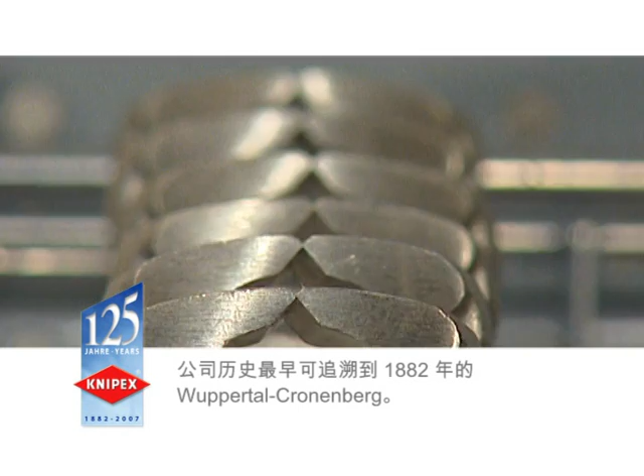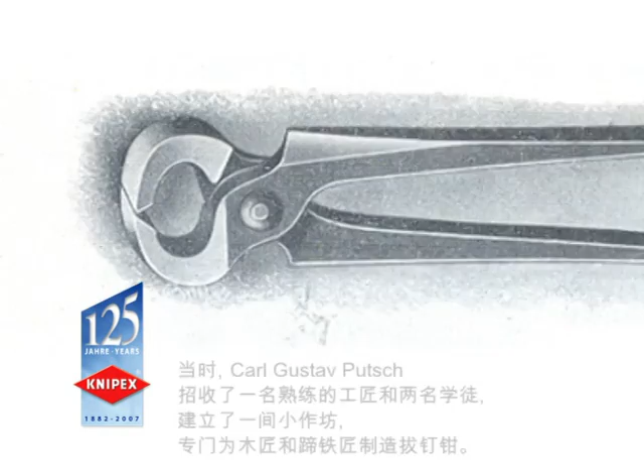It all starts in 1882 at Wuppertal Cronenberg. Carl Gustav Putsch sets up a small forge in which he, an experienced craftsman, and 2 apprentices manufacture pincers for carpenters and farriers. In the beginning, the small enterprise produces 60 pliers per day, all handmade.

At that time, there are more than 100 producers of pliers in the Bergisches Land region, the center of German tool manufacturing. Carl Gustav Putsch and his son Karl, who took over the company in 1922, are one of the successful manufacturers. They invest and expand.

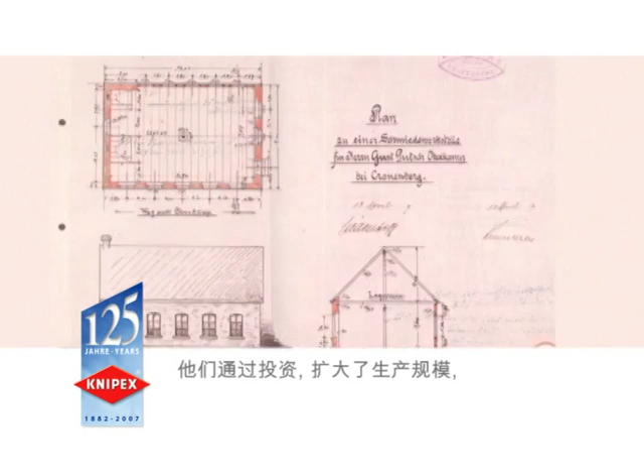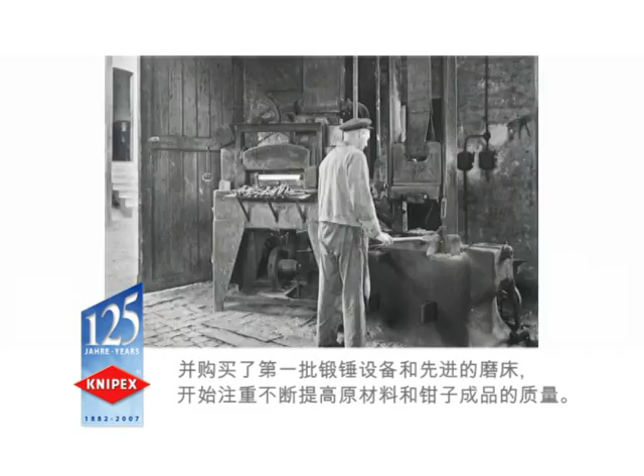The first forging hammers and modern grinding machines are purchased. The material and finish of the pliers are continuously improved. By 1927, 27 employees are producing 1,000 pliers a day.

The small workshop has grown into a factory. The pliers are mainly sold through exporters and wholesalers.

Carl Putsch recognizes how important it is to give his excellent products a proper name. First, he uses the symbol CGP for Carl Gustav Putsch. Then, in 1942, he gets the brand name KNIPEX registered.

After the difficult years during the war, the company resumes work without having suffered any great damage. The product range is gradually expanded. Key products such as combination pliers, diagonal cutters, and water pump pliers are added to the KNIPEX product line.

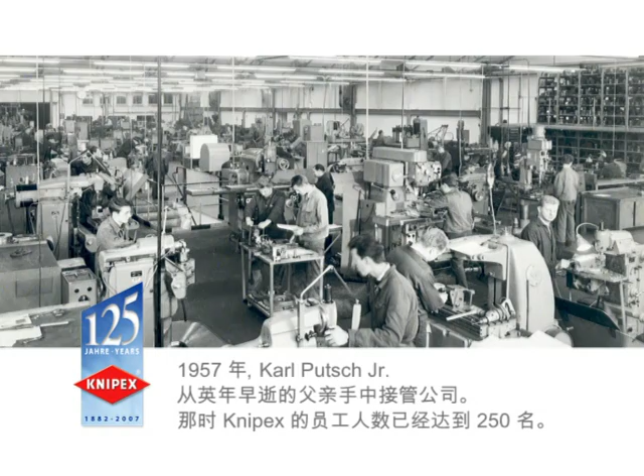In 1957, Karl Putsch Jr. takes over the management of the company from his father, who died at an early age. KNIPEX then has 250 employees.

As a graduate engineer, he vigorously uses modern technologies to improve production and make it more cost-efficient. He is well aware of the importance of a good price-quality ratio.

Product innovations are also becoming more and more important. The newly designed pliers are of superior quality and set new standards in the industry.

Karl Putsch's wife Ilse merits a large share of the success. She is largely active in sales and enjoys great respect in the industry.

A large number of countries are now supplied directly, and the KNIPEX network of representatives is growing. KNIPEX first becomes the leading manufacturer of pliers in Germany and then in Europe.

1987. The company then employs a workforce of 500, and Ralf Putsch joins the company. Ralf then assumes sole responsibility for the company in 1996.

The up-and-coming generation continues to build on the solid foundations that built KNIPEX. The distribution system is further extended, and KNIPEX marketing is reinforced. The first sales offices are founded and staff engaged abroad.

Several manufacturers join the KNIPEX group. With their help, KNIPEX strengthens its position in certain product and market segments.

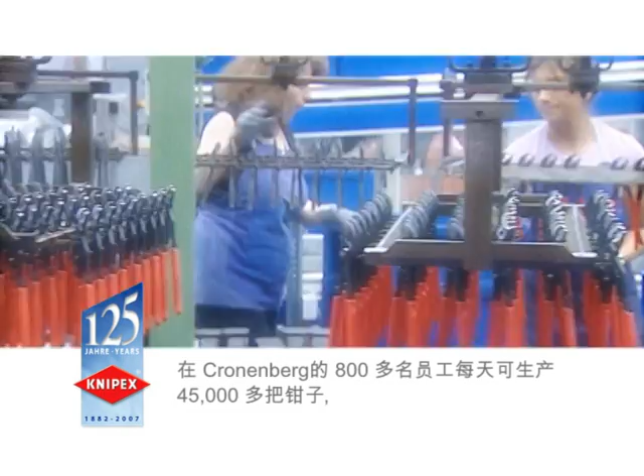Today, KNIPEX is the world's leading brand of pliers. More than 800 employees at Cronenberg produce over 45,000 pliers a day. To offer the best tool for every application, the product range now consists of over 1,000 pliers.

The continuous improvement of the range requires creative minds. How can hand force be reduced when cutting and gripping? How can work be done faster? How can the load and life cycle of pliers be raised? With what material and design? How do we improve ergonomics and safety?

Again and again, our fresh ideas create a competitive advantage. Modern software and systems engineering turn our ideas to the stage needed for production.

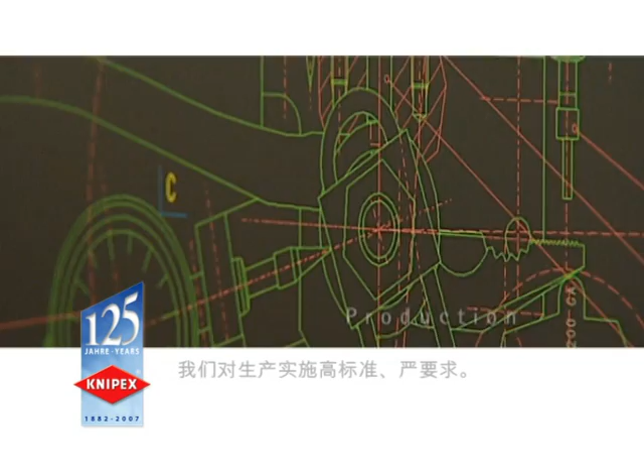We place high demands on our production. It is important that we directly control all conditions and processes. The high-quality steel is produced to our own specifications. The forging dies are milled internally on the basis of design data.

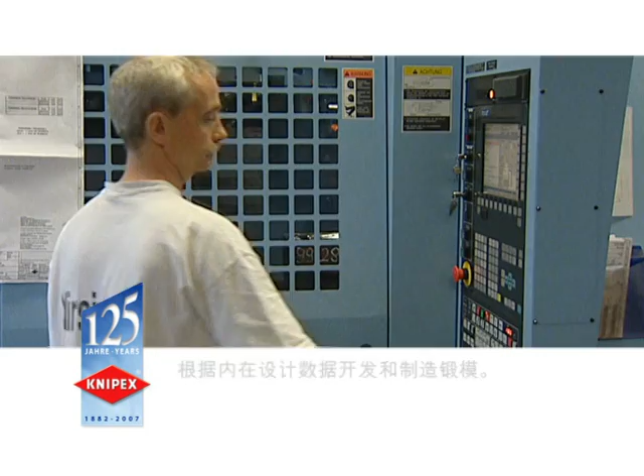The foundation for quality is laid during forging, just as it was 125 years ago. Modern production machines carry out the subsequent machining and assembly operations.

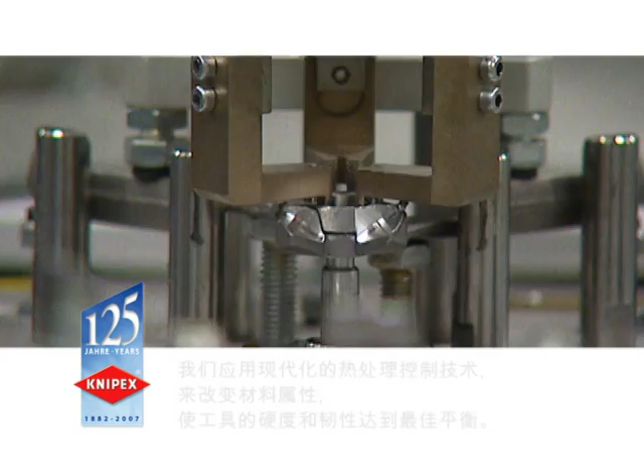We influence material properties by means of modern controlled heat treatment and thus achieve the best relationship between tool hardness and toughness.

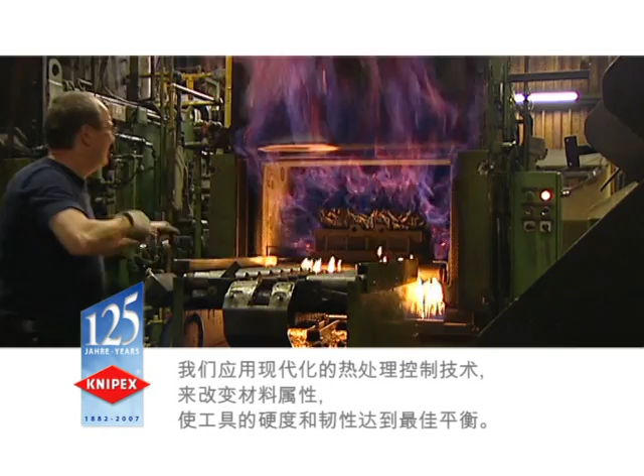The efficient production of pliers meeting the highest demands requires both modern technology and an experienced, well-trained workforce. These create precision and reliability. We accept nothing less.

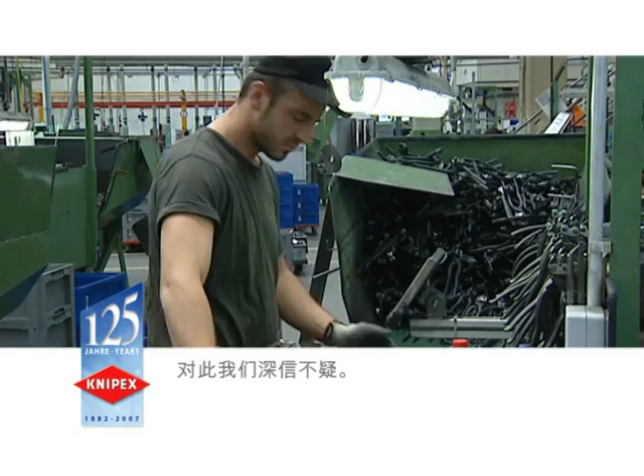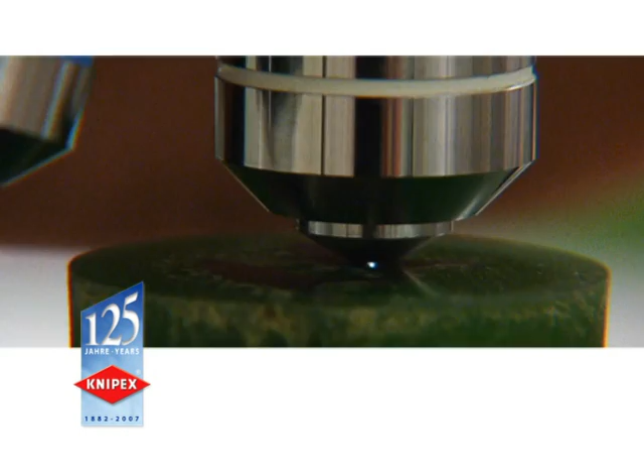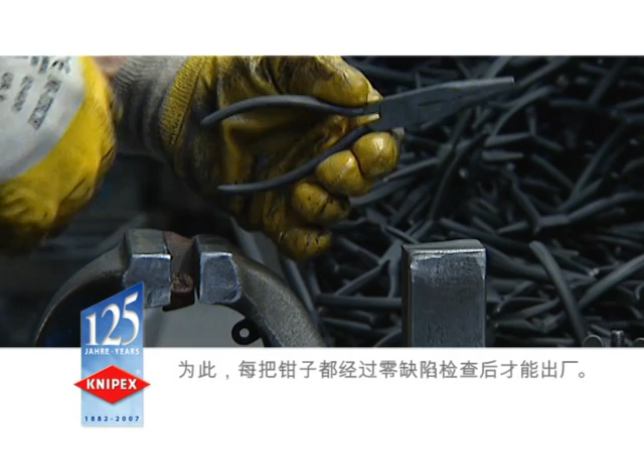"100% reliability." This is what our customers expect. For this reason, each pair of pliers is checked as to faultless operation before leaving our factory.

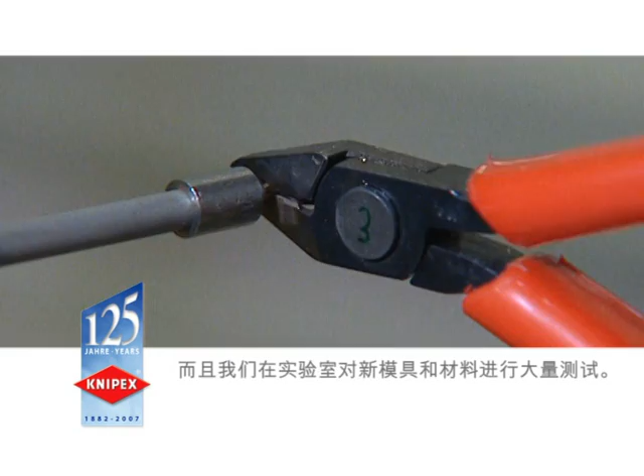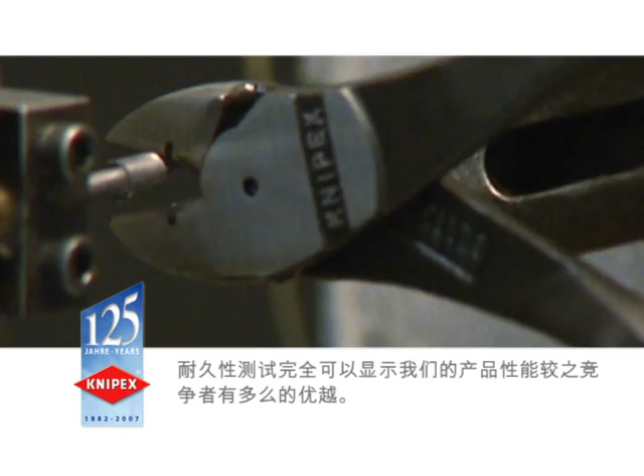We test new models and materials very extensively in our laboratory. Only those that passed the rigorous KNIPEX test procedures are released for manufacturing. Our endurance test shows just how great our lead is over our competitors.

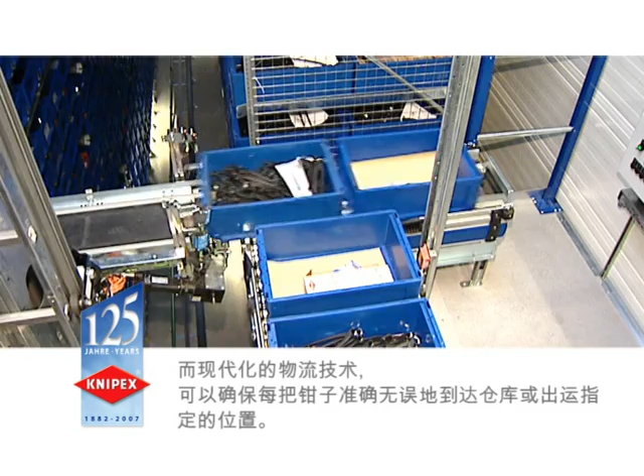Tens of thousands of pliers a day require a well-tuned logistics system, particularly in view of the high number of variations. Ultra-modern material flow techniques make sure that each pair of pliers reaches the right place in the warehouse or shipping department.

From here, the pliers are sent to all continents. We are present in 100 countries of the world thanks to our importers, representatives, and branches.

Although each market is different, there is always a path ahead. The key to success lies in close, effective cooperation with our partners. Our export share today is 65%.

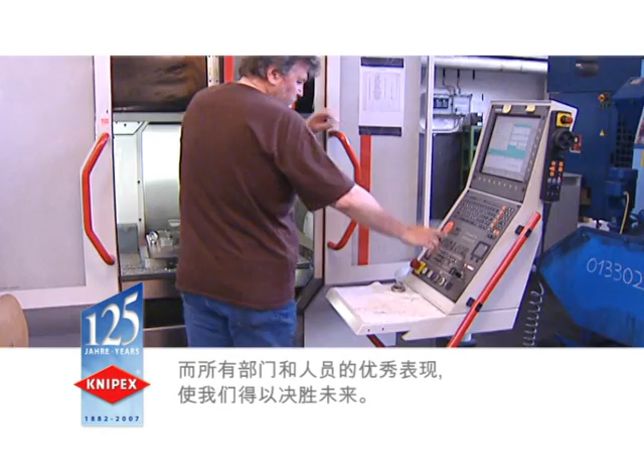We fully realize that our workforce represents our most important asset. Our employees have the knowledge and ability without which we would be unable to maintain our competitive edge. Only by above-average performances in all sectors and at all levels can we be successful in the future.

The special commitment of our staff and short decision-making paths are the typical advantages of a family-owned company.

Values are important to us. We do not wish for success at all costs, and not at the expense of the environment.

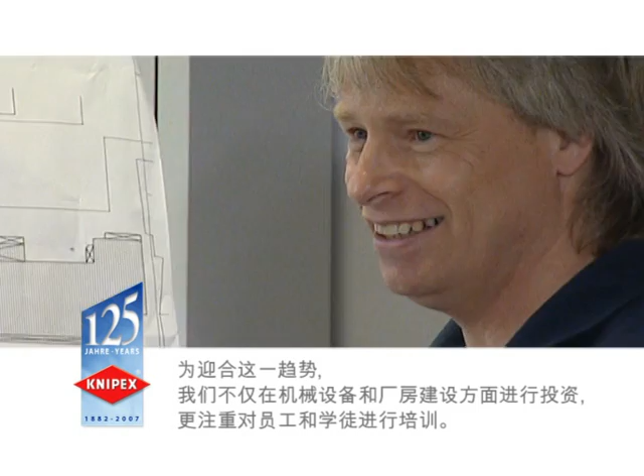The demands placed on our work and services are steadily increasing. That is why we are not only investing in machinery and buildings, but also especially in apprenticeship and ongoing training. We need both to sustain continuous modernization.

We believe that companies should be good citizens. That is why we get involved in many ways, and particularly in the social and cultural fields. We support many schools, clubs, and other initiatives in our town.

Our annual benefit concert for parts of the world in need has already become an important tradition. We are proud of the many employees who support us in our involvement.

Many things have changed on our way from being a small forge for pliers to being the market leader worldwide. The market too has changed. Globalization and a growing concentration of manufacturers and distributors are determining current trends.

Change necessitates adjustment and new steps. However, a few principles have been important to us right from the beginning, and these we do not wish to abandon.

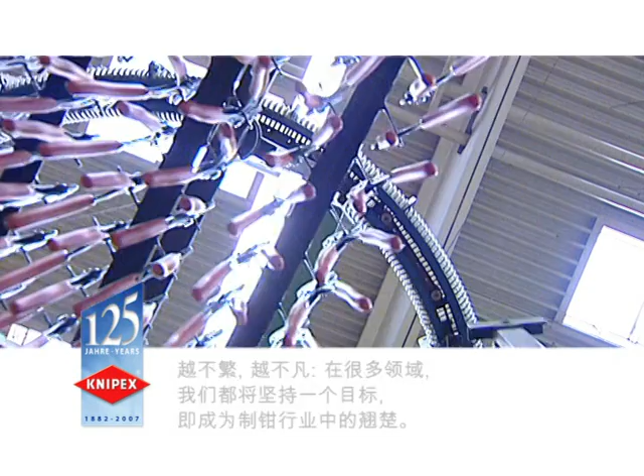Quality is decisive. We place the highest demands on our products and all our activities.

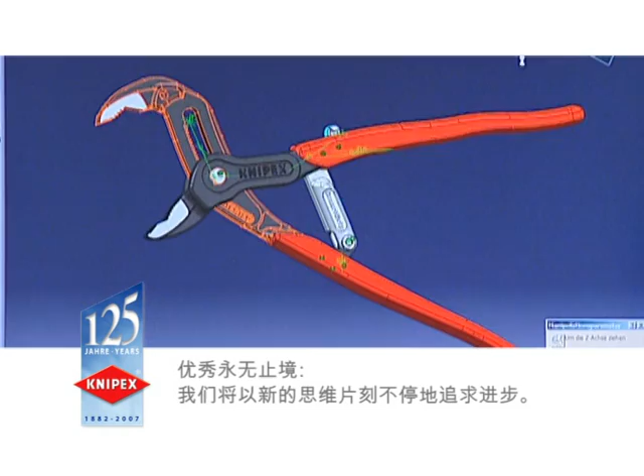Good is not good enough. We work with new ideas for continuous improvements.

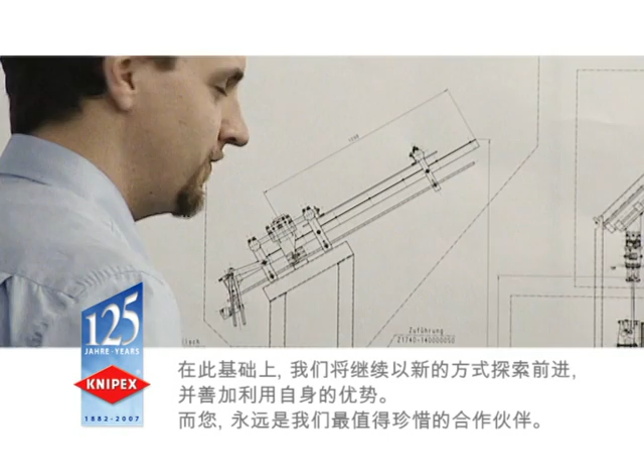Values count. We aim for a fair and good relationship with our workforce, partners, and environment. This is the basis on which we wish to grow, embark on new paths, and make use of our favorable chances, together with you as our valued partners.